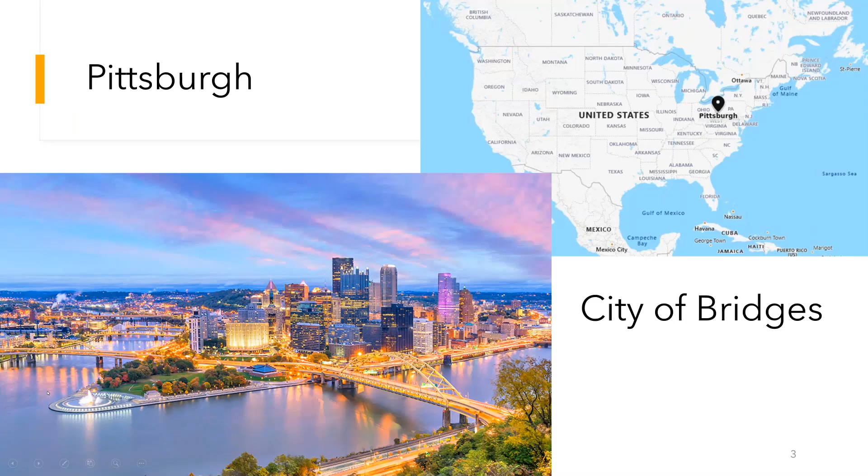As far as the city itself, our bridge portfolio, there are over 450 bridges in the city, but the city itself, we own and maintain about 143 bridges. Just to give you a brief sense of what they're like, we have 89 of those that qualify for the National Bridge Inspection Standards program, so they're over 20 feet and carry vehicular traffic.

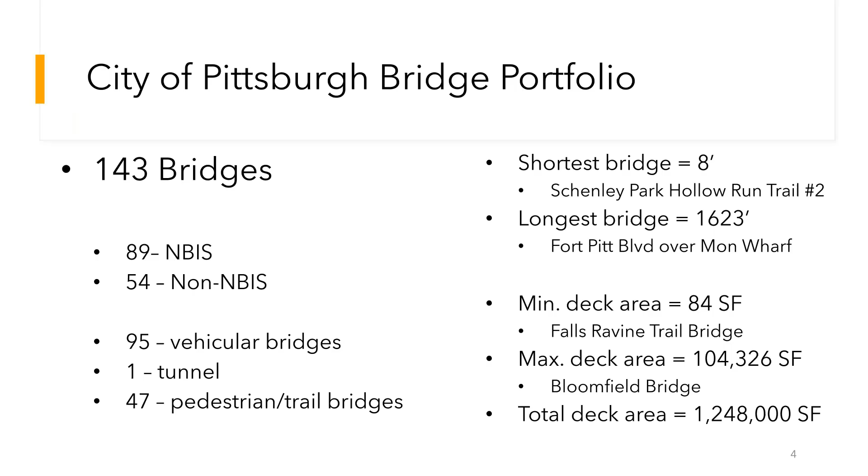We have a lot of pedestrian bridges or trail bridges, 47 of them. Our bridges range in length from 8 feet up to over 1,600 feet in length. Our biggest bridge has a deck area of over 100,000 square feet, and we maintain about 1.25 million square feet of deck area total. So I'm going to jump in and talk about the reconstruction of the Fern Hollow Bridge.

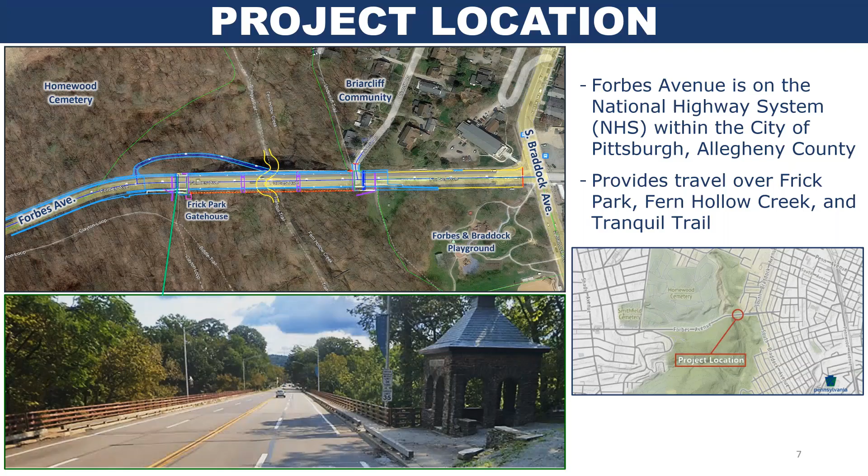So the Fern Hollow Bridge carries Forbes Avenue, a 4-lane NHS road, in the City of Pittsburgh in our eastern area over Frick Park. And the picture below is the previous bridge, shown through the trees. It was a steel K-frame structure, non-redundant, made of uncoated weathering steel. The bridge was about 450 feet long and carried about 21,000 vehicles per day. It also had a lot of pedestrian and bicycle traffic due to being in a park, and carried bus traffic.

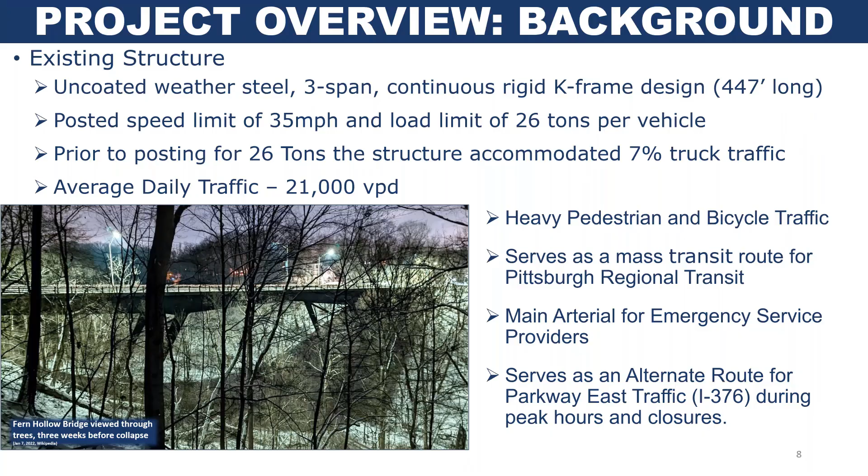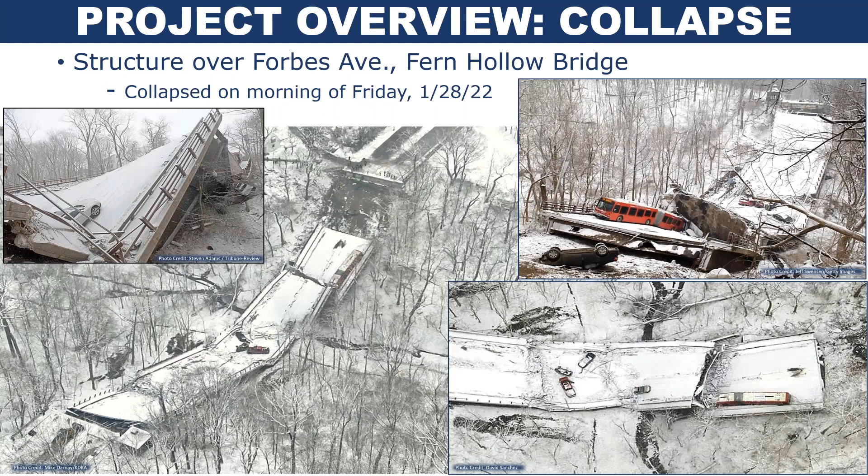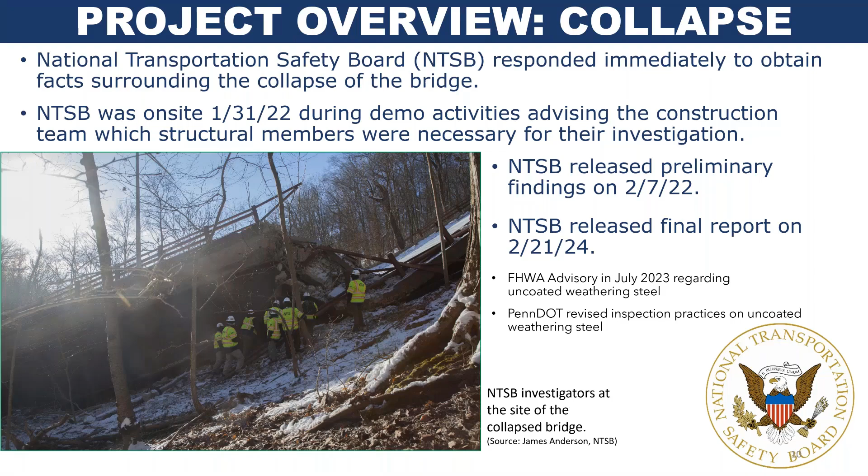Immediately after the collapse, the National Transportation Safety Board, NTSB, responded and did a thorough investigation of the collapse and some of the causes of it. I'm not going to go into that portion of this in this presentation, but the NTSB did release a final report in February of 2024, and all that information is available on their website. So if you're more interested in the collapse portion of it, I would encourage you to check out the NTSB's website where you can find the reports.

One of the first things that was done was to remove the vehicles from the collapsed bridge. One of the challenges was removing the bus, and Allegheny Crane Rental provided a very large crane that actually picked the bus up off the bridge and set it back onto firm ground.

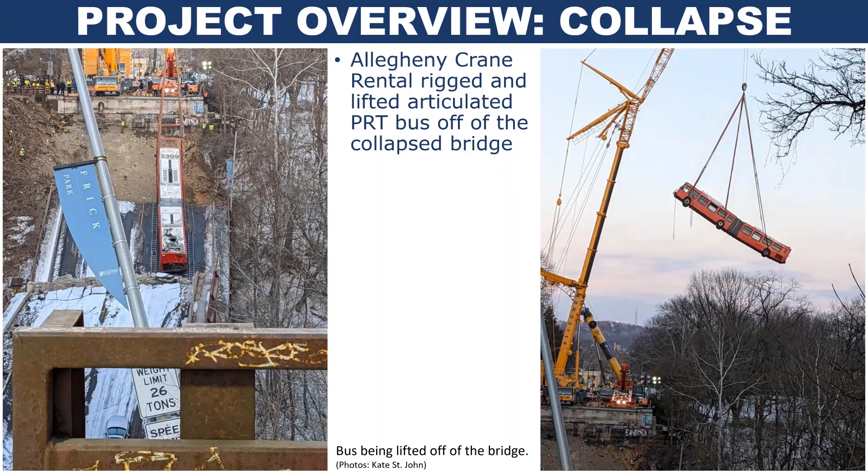Immediately the city of Pittsburgh worked with Pennsylvania DOT to rebuild this important structure, and the governor of Pennsylvania issued an emergency proclamation. The mayor also issued a declaration of emergency in the city. This allowed us to really fast track the reconstruction project.

There was a reimbursement agreement that delegated responsibility from the city to PennDOT, so they basically took over the project and ran it in coordination with us. The emergency allowed them to use a sole source procurement method and ultimately a progressive design build contract, which allowed us to get into construction very quickly, even as the design was still being completed.

We were able to streamline right-of-way, utility, and environmental processes, although all of them were completed. They were just completed concurrently instead of sequentially as they typically are.

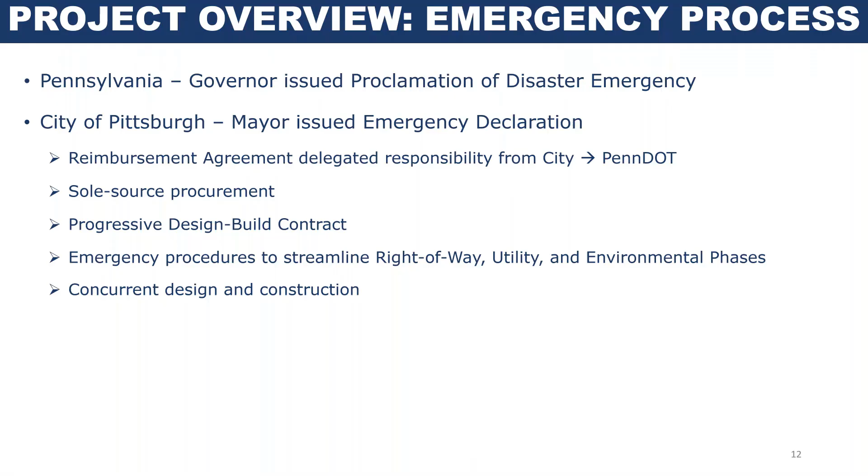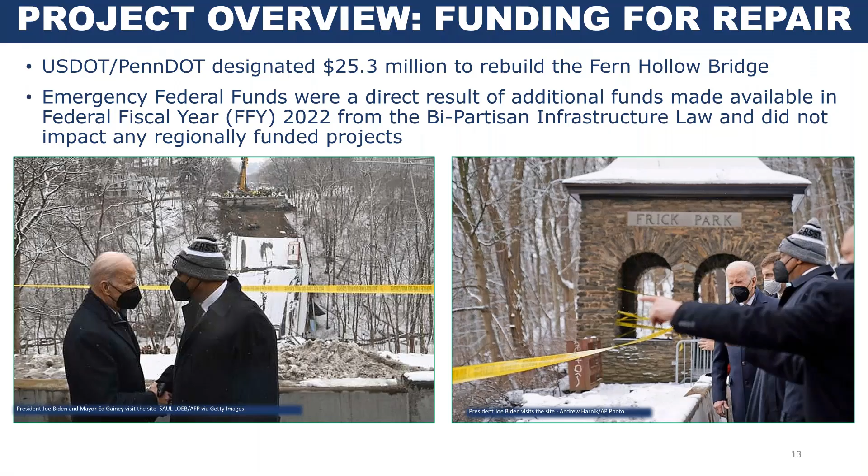It just so happened that President Biden was in town, unrelated to the collapse, that day, and he did come visit the disaster site, which brought a lot of attention to the collapse. $25 million of federal funds were able to be allocated to the project to cover the reconstruction.

There really was great collaboration between the city, PennDOT, the contractor, the designer, and all the various sub-consultants, subcontractors, and suppliers on the project, which allowed it to go very fast. We got through the whole thing and had the bridge reopened to traffic in 11 months, in December of 2022. This would typically take at least 5 years for a normal project, but by collaborating and prioritizing, we were able to really speed that up.

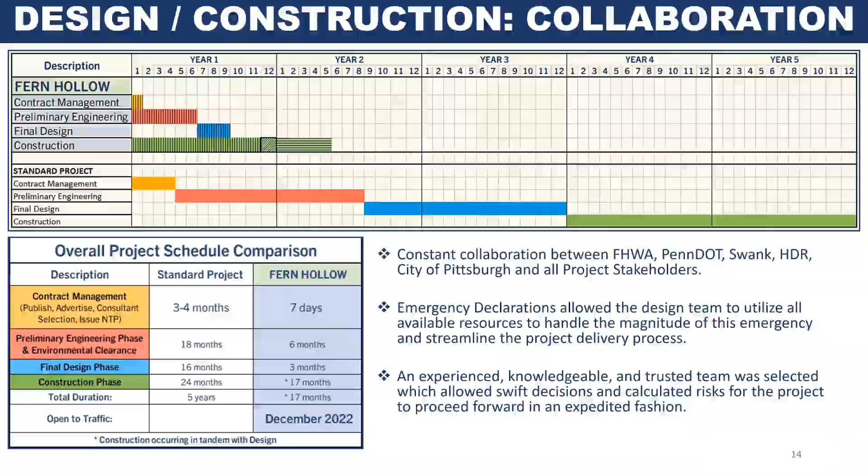Within the first one to two weeks, the city and PennDOT were working together with the design team to settle on a typical section. We were limited by site conditions that prevented widening the bridge, but we were able to reallocate the width a little bit to introduce a shared use path on one side, which was a great addition given the bike and pedestrian activity with the park being under the bridge.

We went with a three-span composite pre-stressed concrete PA Bulb-Tee beam bridge, 460 feet in length. The beams were 8 feet deep and 152 feet long, weighing over 200,000 pounds each. We made the decision to go with pre-stressed concrete based on initial conversations with fabricators and what we felt would be the quickest lead time.

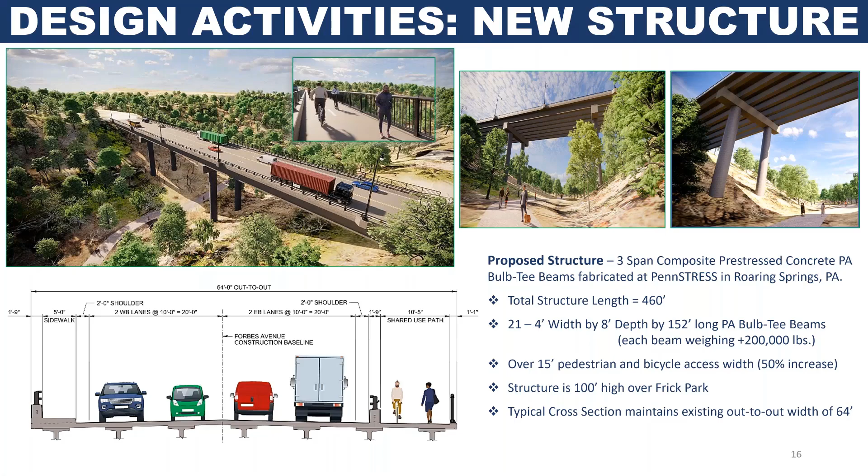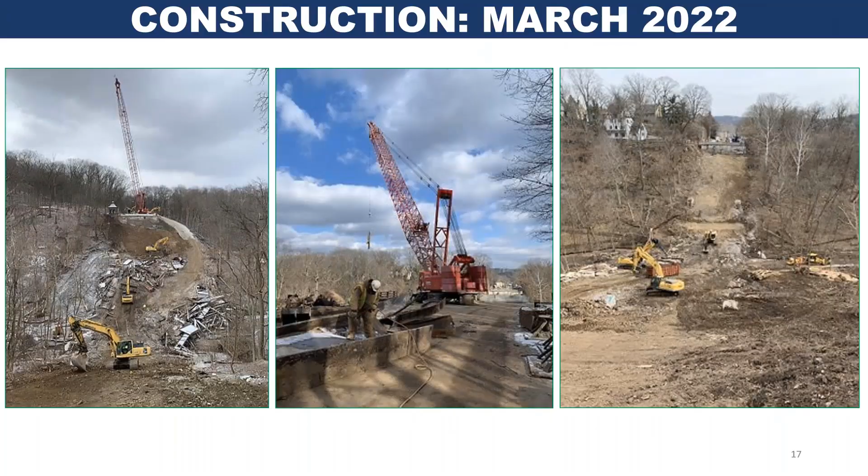Going into March, we were still working on site cleanup, and as you can see, most of the bridge has been removed. There was a bit of a lull in April as we got the design going, but by May and June we were back out building substructure, with new reinforced concrete column piers and integral abutments located behind the existing stone masonry abutments.

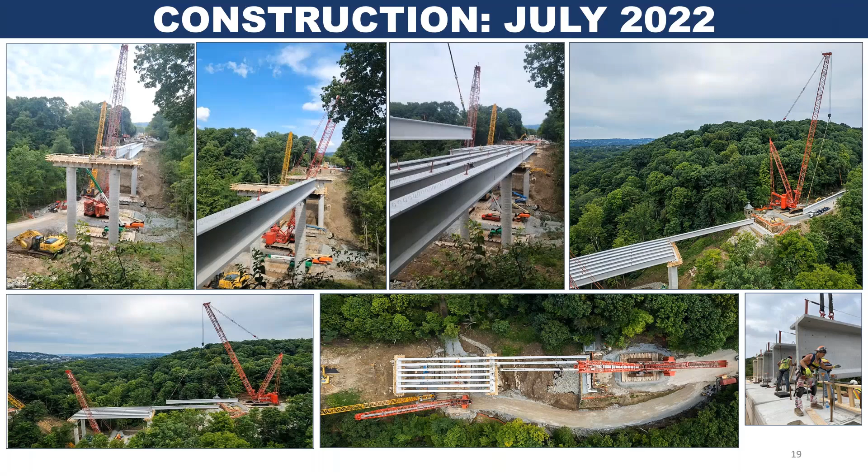In July, the substructure was complete and beams were delivered. Delivering beams was quite the event—they had to come down the Pennsylvania Turnpike and actually get backed up down city streets.

Something interesting was that when these beams came up, the neighborhood came out to see them, and it was almost like a parade. There's a lot of community pride in the reconstruction effort.

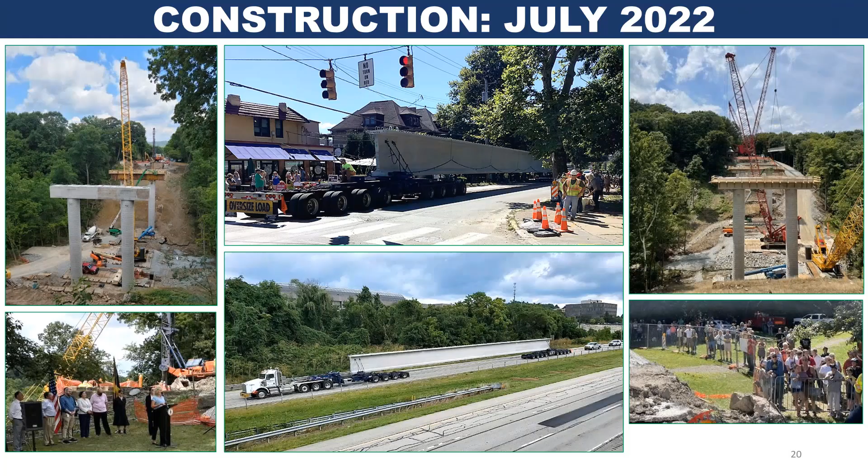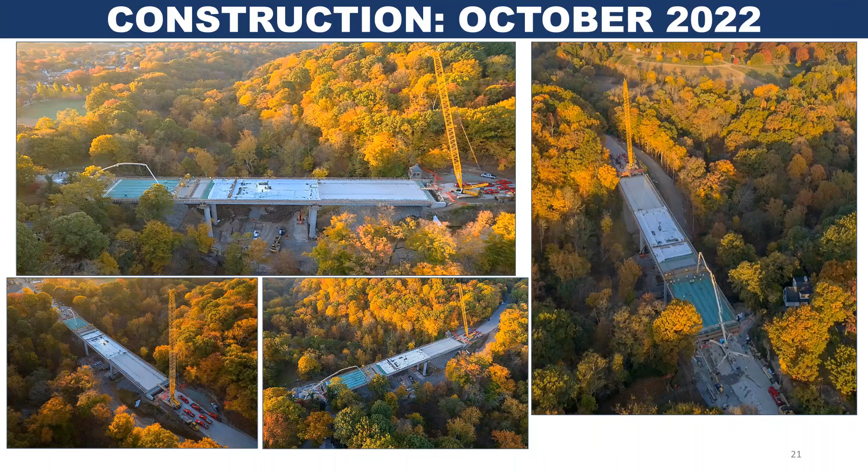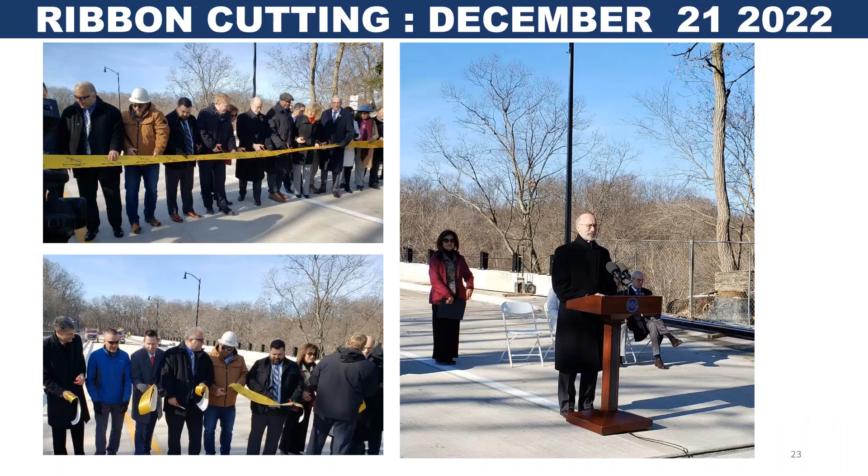Moving into November, we were finishing up the deck and getting the concrete barriers, pedestrian railings, approach work, and those kinds of things completed. Then on December 21st, just before the Christmas holiday, we had a ribbon cutting. The governor of Pennsylvania came in to celebrate the occasion—that's Governor Wolf on the right there. On December 22nd, we were able to reopen the bridge to traffic, in two lanes.

You can see there is a concrete barrier down the bridge, and we were still working on some work on the one side of the bridge, some approach work, and under the bridge site restoration. That work continued into the following spring, until about May or June. But we got the bridge reopened to traffic, as I said, less than 11 months after the collapse happened.

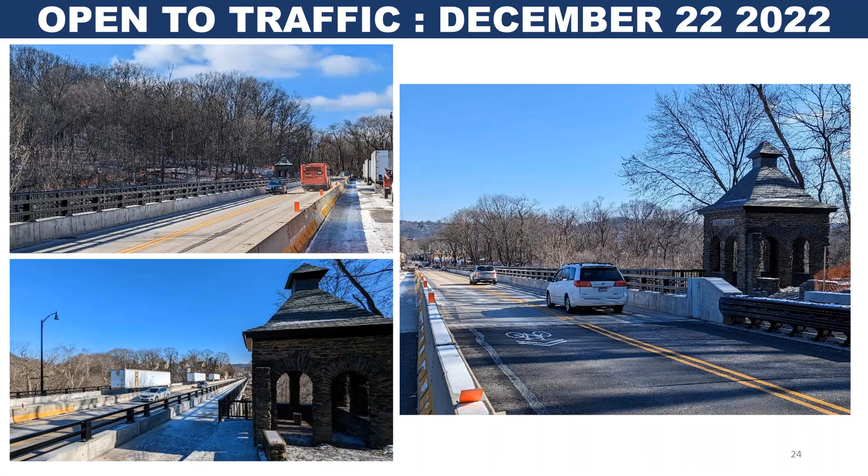So I went through that incredibly fast, but it was a great project, a lot of teamwork and collaboration amongst all the partners that allowed it to happen. Obviously the bridge collapse was a disaster, and as I think I showed, the reconstruction was a great success.

But as you might imagine, after an incident where a bridge collapses, there were a lot of questions, both from the city administration and from the public in the city of Pittsburgh. What about the rest of those bridges? I said we have about 143 bridges. Are they safe? And that's a very reasonable question for people to ask.

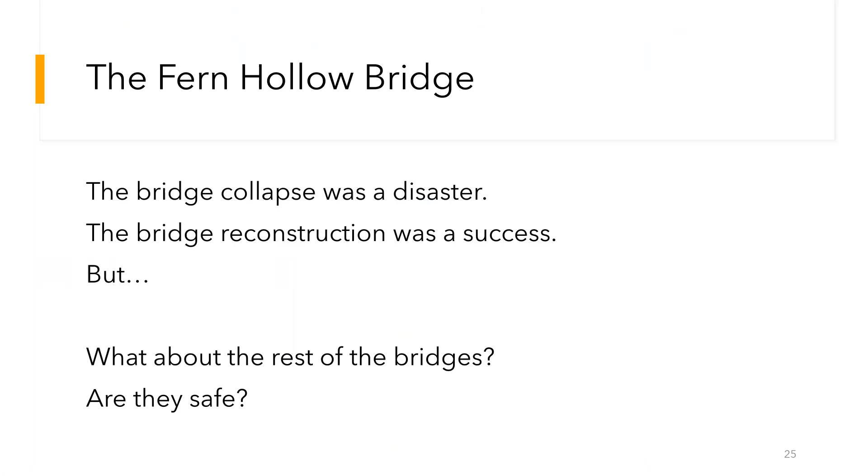So the city decided that we would put out a project for what we called the Bridge Asset Management Program. The goal was simple: to assure the public of the safety of our bridges. We would do that by hiring a team to conduct an independent, comprehensive review of all of our bridges, identify any urgent safety issues, such as high priority maintenance items that were not previously identified.

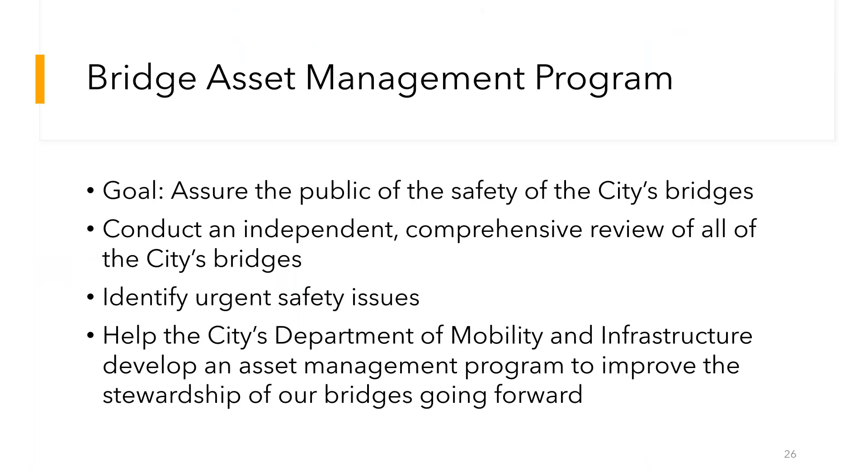Or even the need to close or restrict a bridge based on updated information. In addition to the more immediate needs, we also wanted this program to help the city's Department of Mobility and Infrastructure develop an asset management program to improve our stewardship of our bridges going forward, not just at that moment, but into the future, to make sure we prevent something like this from happening again.

So with that, I'm going to turn it over to Lou, who's going to talk to you a little bit about this program. Okay, thank you, Eric.

So as Eric said, WSP was hired on August 31st, 2022 to provide a comprehensive bridge asset management program for the city. One of our first tasks was to get a report to the mayor as quickly as possible, by October of that year, to basically ensure that there wouldn't be any more Fern Hollows out there in the city's inventory. And then ultimately we completed the project by May of 2024.

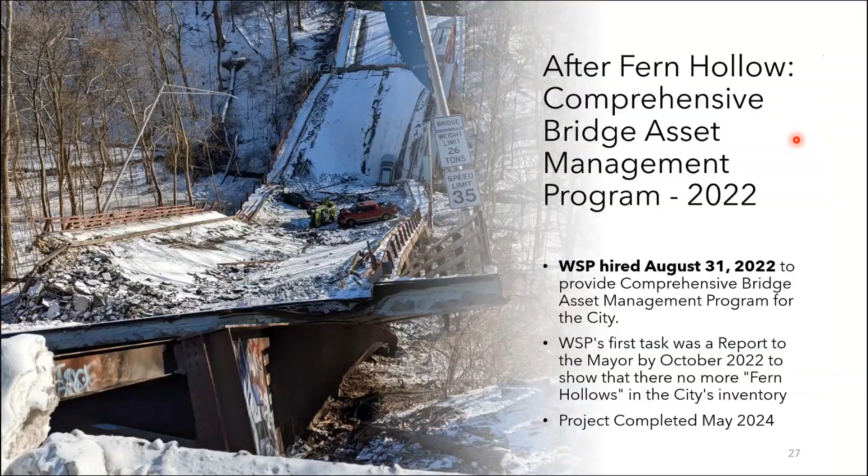I know one of the questions we got prior to the webinar was, what about the reports? Would they be available to everyone? You can see WSP's reports and recommendations on the city's website at pittsburghpa.gov/mayor/BAMP. Task 2 of our project was to do the report to the mayor.

We did get it to them by end of October, and after reviews by the city, the mayor was actually able to report during the opening of the new bridge that the report was complete.

Task 3A was to develop a list of intermediate or near-term needs, and we delivered that in March of 2023. Task 3B was a review of the Southwestern Pennsylvania Commission's Transportation Improvement Program and the city repair plan, which we delivered in May of 2023.

Task 4A was a summary report of recommended routine and preventative actions, including investigation into Bridge Care, which is PennDOT's program that does programming and what-if scenarios for all the bridges in the state. We delivered that in August of 2023.

Task 4B, we recommended intervals for bridge rehabilitation and/or replacement, also known as the Rehabilitation and Replacement Decision-Making Process Report. It was finished in September of '23.

5A and 5B were recommendations for Bridge Maintenance Division staff and technical staffing for the city's Bridges and Structures Division, which was delivered in December of '23.

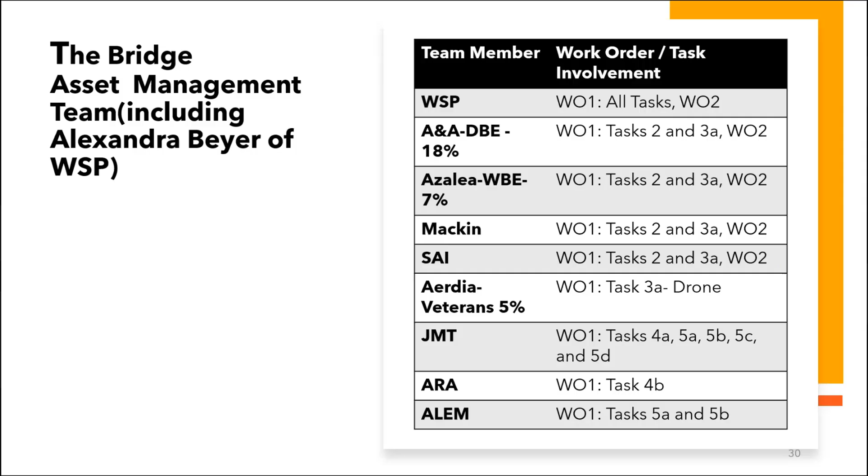We had inadequate inspection history for some of the non-NBIS bridges, like the short span bridges in the park and pedestrian bridges. Ownership records were unclear at times. As Eric mentioned earlier, there's over 400 bridges in the city owned by city, state, transit, PRT, railroad, and sometimes private individuals. There were opportunities to improve the organization and access to the original construction plans.

As a result, we decided to use a SharePoint site to share documents that both WSP and the city could update, and that turned out to be a really good tool for us.

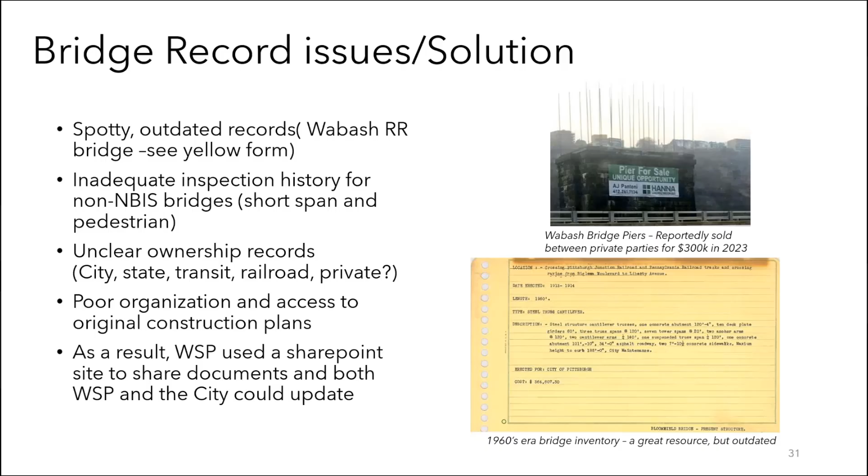A little bit of highlights of the Task 2 report. We had to go through inspection reports and photos for 147 bridges, and we found out there were no more Fern Hollow bridges out there, which was good to hear and see.

The bridges were inspected, and we wanted to make sure the conditions were consistent with the photos, and identified maintenance priorities. We made sure there weren't any out of compliance with PennDOT and federal highway policies, and then we even identified new items as necessary.

We confirmed the weight limits matched the load rating and the signs were properly placed. We recommended any new inspections, load ratings, and any new sidewalk or bridge closures.

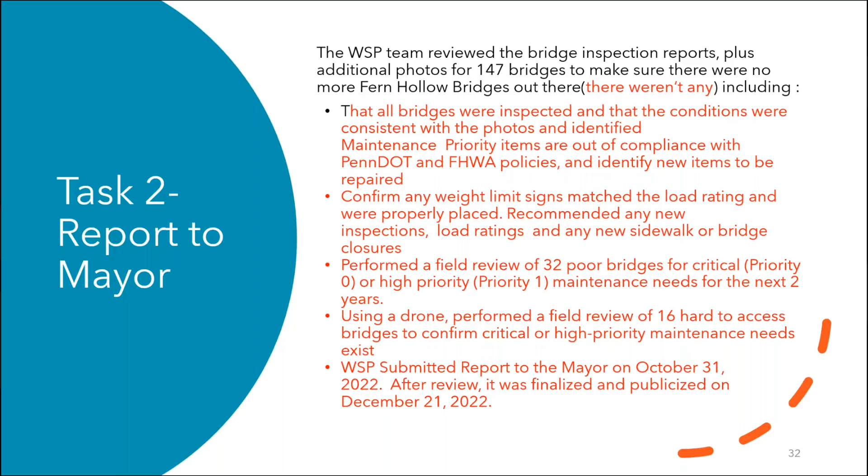We performed the field review of the 32 poor bridges, making sure that the critical and high priority maintenance needs were solid for the next 2 years. We used a drone to field review 16 of the hard to access bridges to confirm, again, the critical and high priority maintenance needs. As I said earlier, we submitted the report to the mayor in October and it was finalized on December 21st of 2022.

Some of the examples of the findings—here you see the gusset plate for the Charles Anderson Bridge. You can notice some of the holes there around the gusset plate. It was previously analyzed in 2012, but we recommended a new analysis, and it was a good thing, because as a result of that analysis, the bridge had to be closed due to the lower ratings. Currently that bridge is out in construction, undergoing a major rehab.

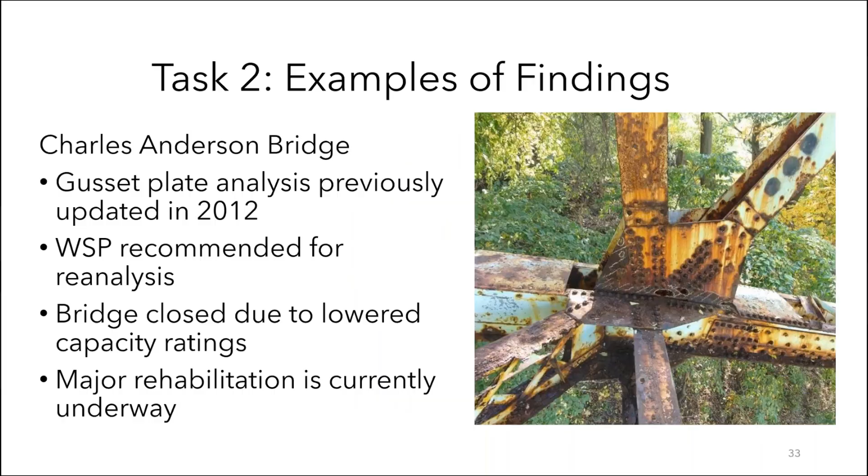Task 3A was to develop the immediate needs, which we defined as zeros—needing to be done within 7 days—and ones, needing to be done within 6 months. Then the near-term needs, defined as priority 2s that need to be done before the next inspection, which in most cases is 2 years. All in all, when we were done, we came up with $11 million in needs.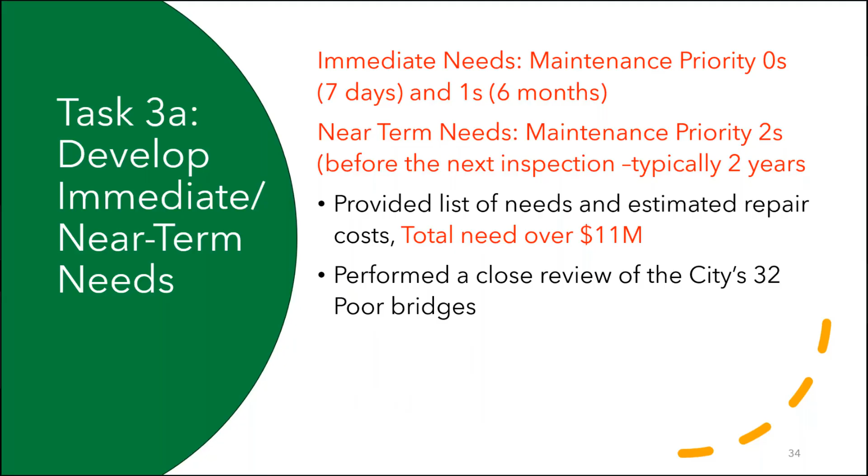We also performed a close review, as I mentioned earlier, of the city's 32 Poor bridges to confirm those needs. This is a little spreadsheet we used to keep track of everything—not only the maintenance priority, but what the city was going to do about it, whether they needed their bridge maintenance on-call contract out there, and when the repair needed to be done and when it was actually done.

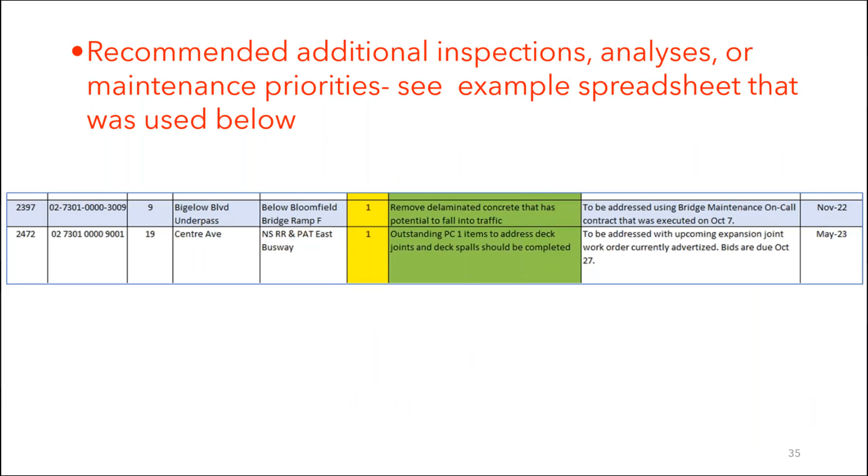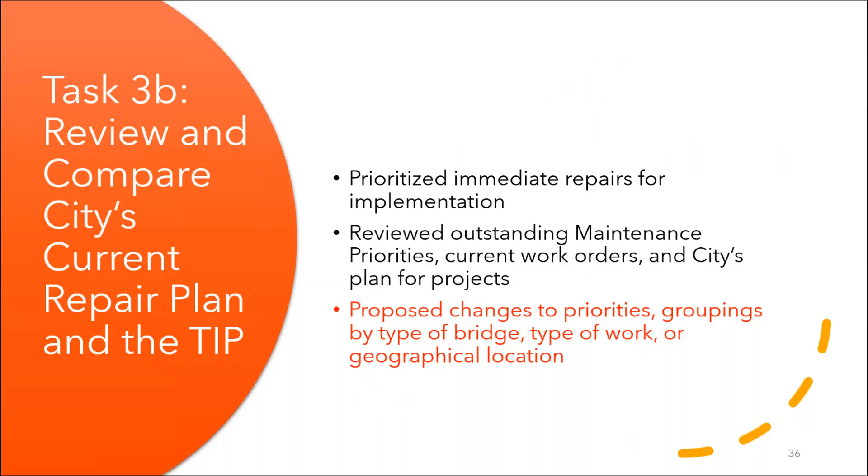Task 3B reviewed and compared the city's current repair plan with the Transportation Improvement Program for SPC, the Southwestern Pennsylvania Commission. We looked for prioritized immediate repairs for implementation, reviewed all the maintenance priorities, current work orders, and the city's plans for those repairs, and then proposed changes to priorities, groupings by type of bridge, type of work, and geographical location.

Again, we used a spreadsheet to help us with that, and we looked at where the projects were on the proposed TIP, the proposed 12-year program, and what the status was on maintenance. We came up with cost estimates for these projects, and even suggested the years at which preliminary engineering should start, final design, and then construction.

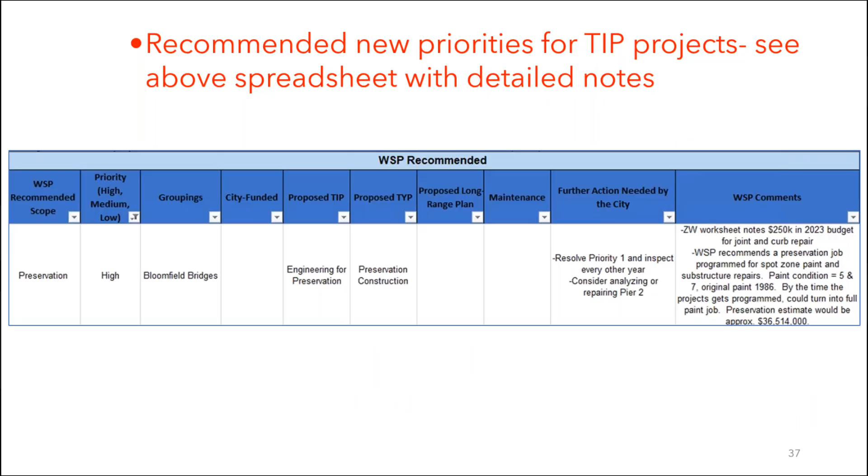Task 4A was to recommend strategies and timeframes for preventive and routine maintenance. A lot of these items came from my days back at PennDOT in District 11, Pittsburgh area. We tried to clean bridges annually whenever we could. Combustible materials identified under 17 bridges, also known as homeless encampments, were identified.

We also tried at PennDOT to replace joints every 20 years, and do full paint about every 35 to 40 years, or spot and zone painting at the 20-year time frame.

With our deck overlays, we'd shoot for 8 to 10 years for asphalt overlays with a membrane. Latex overlays generally lasted 15 to 20 years. With polyester polymer concrete overlays, we were anticipating them to last 25 years.

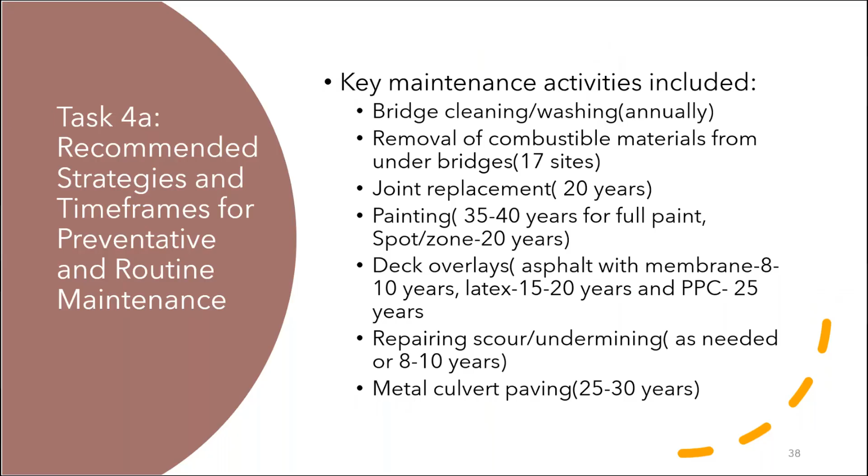Scour repairs are usually identified either by probing or underwater inspections. We try to get those done as quickly as 8 to 10 years. And then we did a lot of culvert pavings to extend the life, trying to do it around 25 to 30 years to get another 15 or 20 years out of those culverts.

Task 4B, we recommended bridges for preservation, rehab, and full replacement. A lot of this was based on the PennDOT District 11 plan for each bridge that was developed with my staff and I at the time before I retired.

For these timing considerations, we tried to shoot for 15 to 20 years for preservation projects, 40 to 45 years for deck replacements. Those would get extended to 60 years if we had good rigid overlays on them. A 160-year life cycle for major bridges and major river crossings, down to 120-year life for the rest of them, except for culverts. We look to get about a 40-year life for those metal culverts.

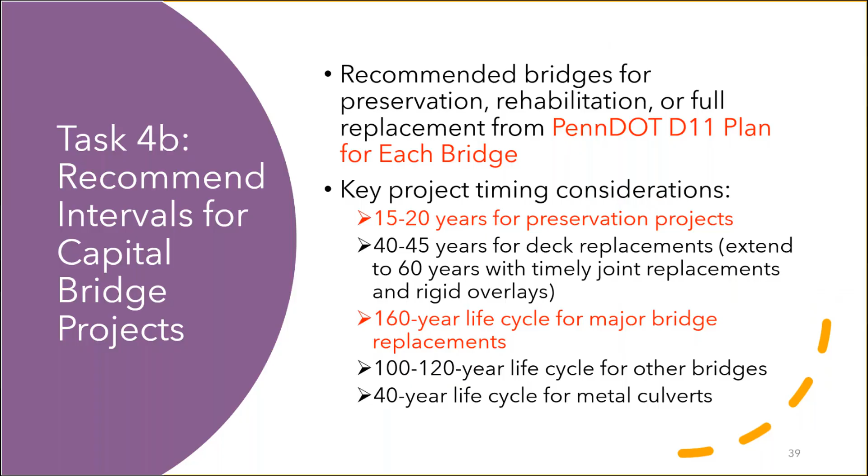Under the staffing, 5A and 5B, we had to create a bridge maintenance division. They only had a bridge maintenance contractor there at the city, and then we recommended staffing for their structure division, which included bridges. We went in and looked at everything.

We looked at numbers of staff, the positions, the skills. They wanted to know the compensation needed to pay these individuals. And we looked at either rental or buying equipment options for them and funding as necessary. We talked about making sure you had a good emergency response plan as part of that staffing.

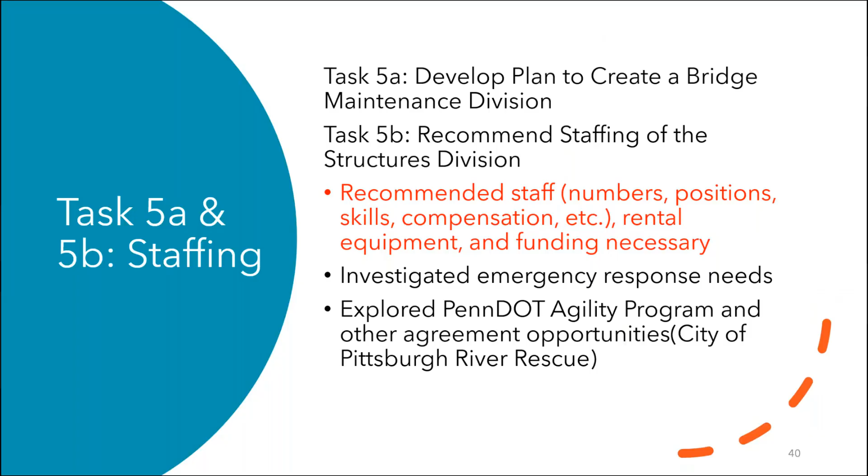We even looked at the PennDOT Agility Program and other agreement opportunities. The Agility Program is basically where the city does some work for PennDOT in exchange for work that PennDOT does for the city. An example is they have a river rescue boat that we've used a number of occasions when barges get hit, and we get on that boat, take a look at the bridge piers and the bridges in general, and then we're able to open the bridges a lot sooner than if we hadn't had that boat.

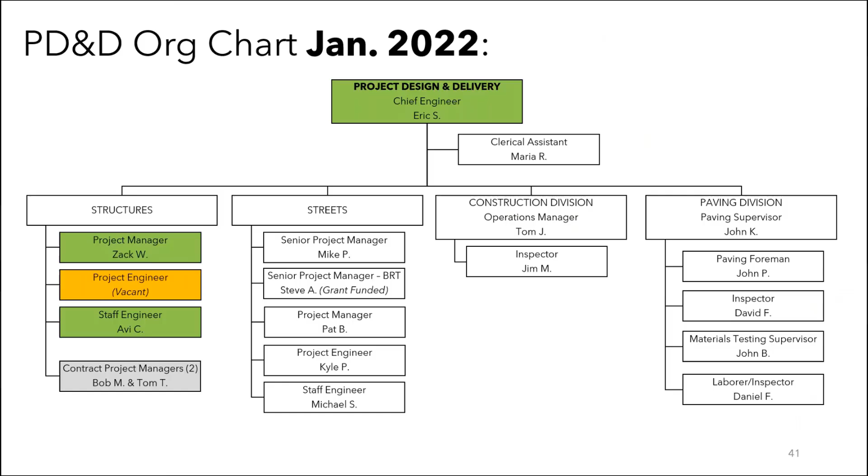As we went through our recommendations, we recommended increasing the staff from 7 to 25 employees, spread between the maintenance division and the structure division. You can see we recommended breaking up the design and inspection sections under a bridge asset manager there on the left. We also included CADD technicians so they could do their own bridge design projects in-house, and have some people available to do inspections as needed. That was prior to the collapse.

That was being done by just design people who just didn't always have the time to get out there and work on maintenance priorities. So we thought those should be new positions. We also added some senior project managers, regular project managers, and a city bridge engineer. We also suggested a bridge maintenance supervisor with a foreman, and then 3 maintenance crew positions, along with a project administrator to help with some of the reimbursement agreements, getting them through the system.

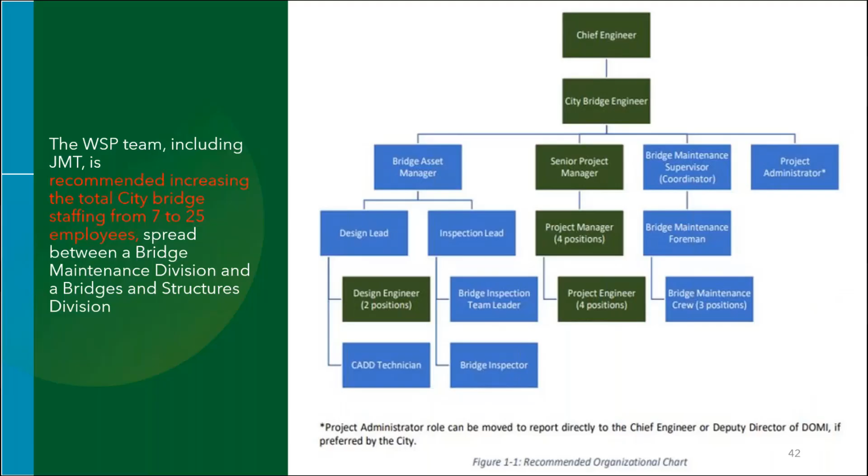Under task 5C and 5D, we were looking at process improvements. We identified inefficiencies in the current city processes. Some of the things we were suggesting: they want us to look at contracting, reimbursement agreements, especially a city-specific reimbursement agreement, legislation if needed for things like design build, and budgeting.

We recommended the use of higher project estimates to reduce the number of reviews by the Office of Management and Budget, the Law Department, and the City Council. Basically, if a project changed by $1, it had to go back through all those different departments for review, which really slowed the process down.

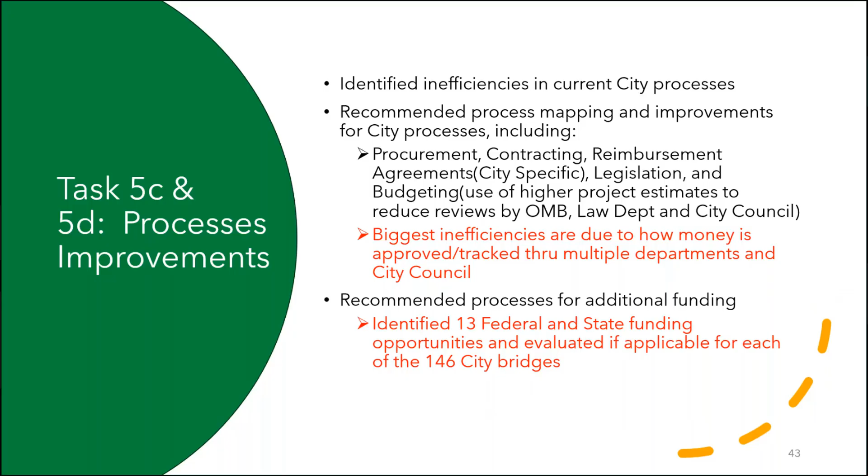And then we recommended processes for additional funding. We were able to find 13 different federal and state funding opportunities, and we basically recommended one or a couple of those for each of the 146 bridges in the city's inventory.

Overall, we recommended 27 recommendations to the city, plus 9 design and construction contracting ideas, like having not-to-exceed contracts, doing bridge bundling. PennDOT District 11 actually created an open-end contract for city design projects, wanted them to be more conservative in their programming and cost estimates, and they were able to do 2 bridge bundles that are currently in preliminary engineering.

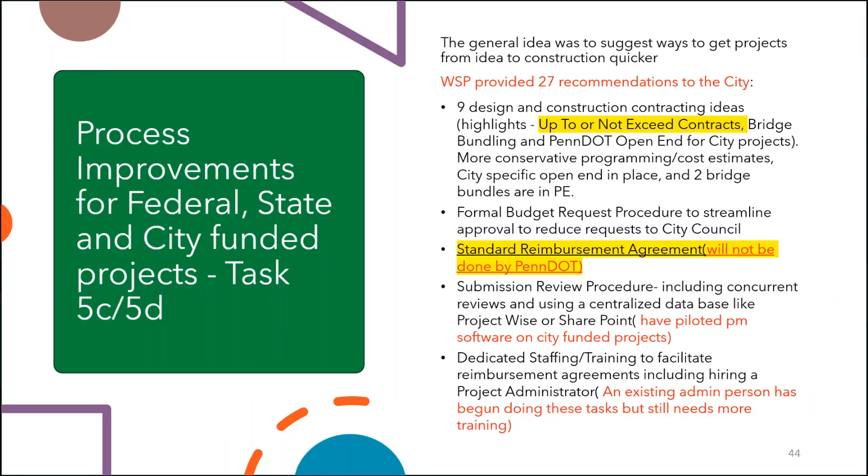We want a formal budget request procedure to streamline approval and reduce requests to the city council, as mentioned earlier. We wanted a standard reimbursement agreement, but that ultimately couldn't be done in discussions with PennDOT. However, they piloted a submission review procedure with concurrent reviews, using a centralized database like ProjectWise or SharePoint, and dedicated training to facilitate these reimbursement agreements. They used an existing administrative person for this, and they've started doing these tasks, but more training is still needed for that person to make the desired improvements.

Thanks, Lou. Lou went through all the effort of the WSP team, but essentially the city was just way behind. For a whole variety of reasons, our staffing had been cut over the years, and we knew we were in a tough spot. This asset management contract made a huge difference. All the things Lou talked about really set us up for success moving forward. It's a big hole, so we're not there yet, but we're making huge amounts of improvement. Fundamentally, the biggest thing is if someone asks, are our bridges safe, we can confidently say yes.

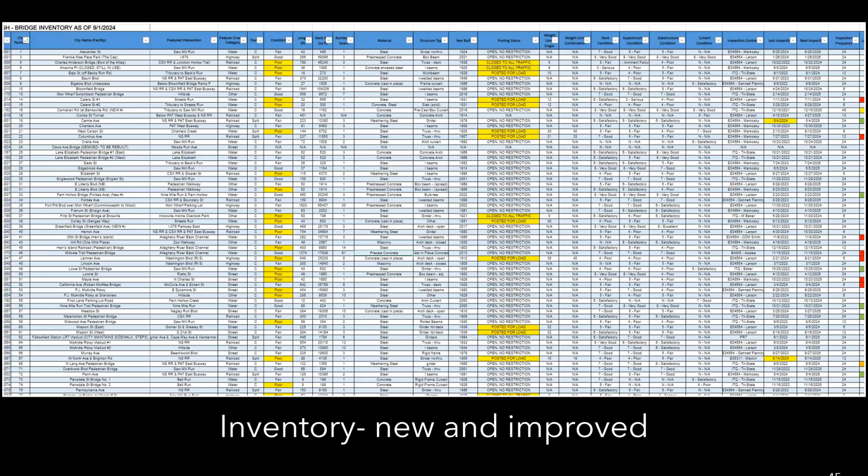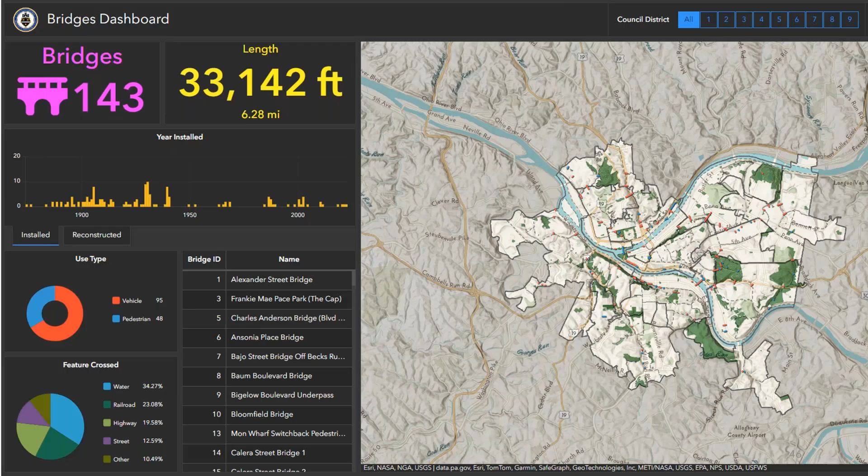So I'll talk about where we're at these days. First, we have a really thorough and accurate inventory now, which, as Lou talked about, wasn't the case before. We're primarily using PennDOT's BMS2 system online, but we can also download that data into spreadsheets for daily data manipulation. We created a public bridge dashboard so any resident can go online and see where our bridges are and some basic stats about them. That's part of our transparency efforts.

In the world of bridge inspection, the inspection for all our NBIS level bridges is done under contract with PennDOT. District 11 handles that contract for us, which is a huge help. But since all this, we've made sure we're very involved in that contract and very communicative. We meet with the inspection consultant every month for two-way communication, to see what they have coming up and to let them know about anything we want them to pay close attention to. As we've been able to grow our staff per WSP's recommendations, we're now able to do detailed reviews of all inspection reports by our engineers when they come in, which wasn't happening pre-Fern Hollow, just based on staff capacity issues.

Lou mentioned they took a close look at analyses, and that kicked off a large effort. Since 2022, we have new load ratings on file for 83 of our bridges, to make sure they're accurately reflecting current conditions. This resulted in 6 closures since Fern Hollow as part of this work. We also had to make emergency repairs at 4 other bridges so they didn't have to be closed, and we've reduced load postings at 12 locations over the past several years. Currently, of our 143 bridges, we have 8 closed bridges in total and 17 load posted bridges in total.

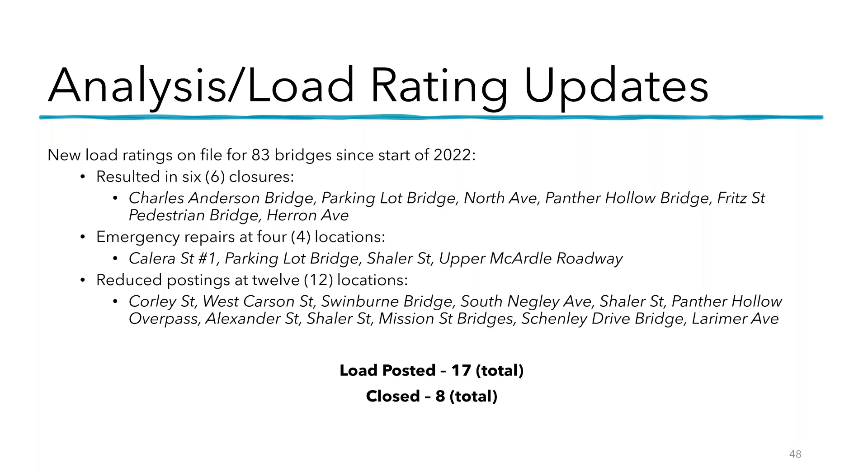It's down at 13%, and nationally it's below 7%. So we have a ways to go.

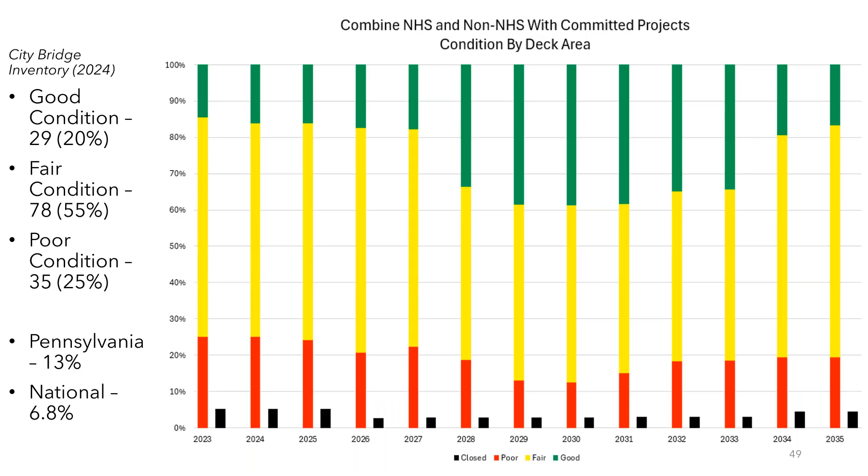We reran this just a couple weeks ago in 2026. Our numbers have not moved much yet because we have a lot of bridges, I'll show in a bit, in the design process right now for major rehabilitations, replacements, or even preservation work. But we've also received more local maintenance funding in recent budgets, which I'll talk about.

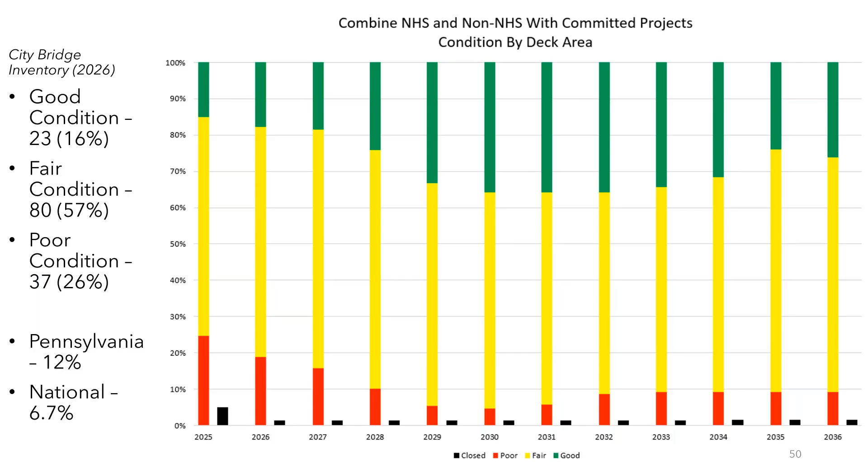That is predicting that with the money we currently have identified, we can get our percentage of poor condition bridges down below 10% in the 2029-2030 range as all this work comes through. So while we're not there yet, it shows we're on the right track, and if we keep up the progress and keep pushing these projects and repairs through, we are moving in the right direction. Part of that is due to increased local funding.

For those familiar with government budgets, usually you have an operating budget for staff and day-to-day operations, and then a capital budget, often funded with bond money, for more long-term capital improvements.

On the operating budget side, before this work, we had no operating funding identified directly for bridge maintenance, so any bridge maintenance work was coming out of our capital budget. After Fern Hollow, we were able to get just under $1 million of maintenance operating budget money annually for maintenance and for other things like local bridge inspection and bridge cleaning, all those things that should be happening routinely.

That number gradually increased, and this year our new mayor reopened our budget and was able to bump that number up to 1.9 million. That's a big increase, and it's predicted we will maintain at least a reasonably similar operating budget going forward.

That makes a huge difference in the amount of work we can get done. Our total spending—of course we do a lot of projects with state and federal money, our bigger projects that are listed on the Transportation Improvement Program, the TIP.

So that's one bucket. But as far as local work we're doing just using our own money, the right graph here compares the 4 years prior to Fern Hollow, where we spent a little under $2 million total, to the 4 to 4.5 years since, where we've spent almost $8.5 million total.

So through additional funding, additional staff, and some other things I'll talk about next, we've really been able to increase the amount of money we're spending annually to get through some of this backlog and make sure our bridges are staying in better condition.

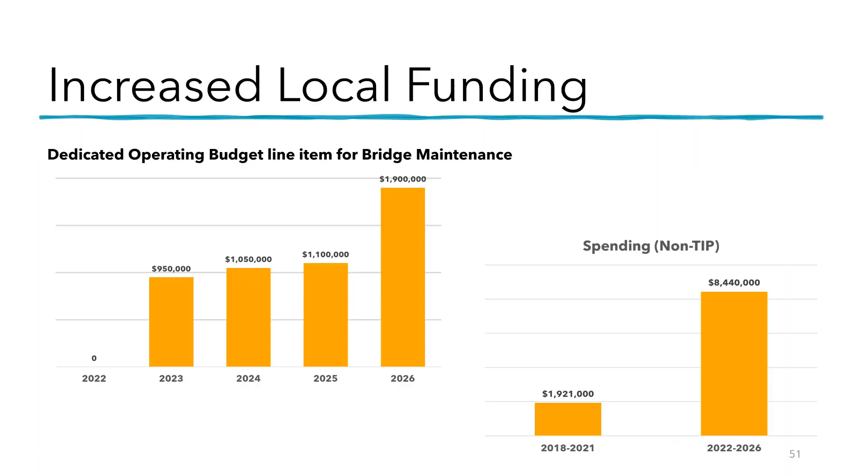Part of that was revamping our bridge maintenance on-call contract. We have a contractor who can do work orders for us—it's a very efficient way to get work done. For a variety of reasons, the previous contract was not working well for us and was hampering our ability to get work done, so our engineers totally revamped that contract in 2022 and then again last year, and as a result it's been much more productive.

We've given out about 69 work orders in the last about 4 years—a lot of deck joint repairs and reseals, either strip seals, compression seals, or even EMSeals, which is something we got from District 11, more of a short-term fix but relatively easy to install. Because as anyone in the bridge world knows, leaking joints and water getting down into the beams and substructure is really horrible for bridge life, so we're putting a big emphasis on that.

We've done about 46 high priority work orders to deal with some of the higher priority maintenance items that Lou mentioned earlier—things like undermined bearings, delaminated concrete that may be causing hazards, exposed rebar in the decks, downspout repairs, girder and steel repairs, things like that.

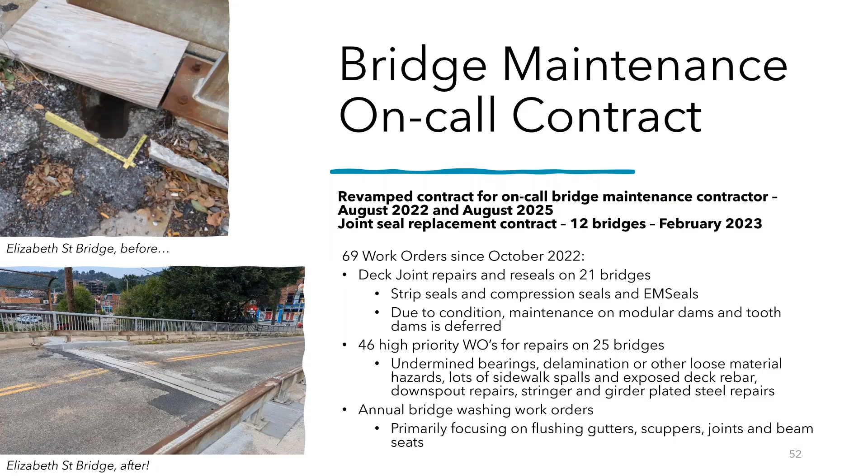We are doing an annual bridge washing work order to make sure we're keeping our bridges clean, keeping the scuppers and gutters functioning so water is going where it's supposed to. The other thing Lou alluded to is we started up a brand new bridge maintenance division.

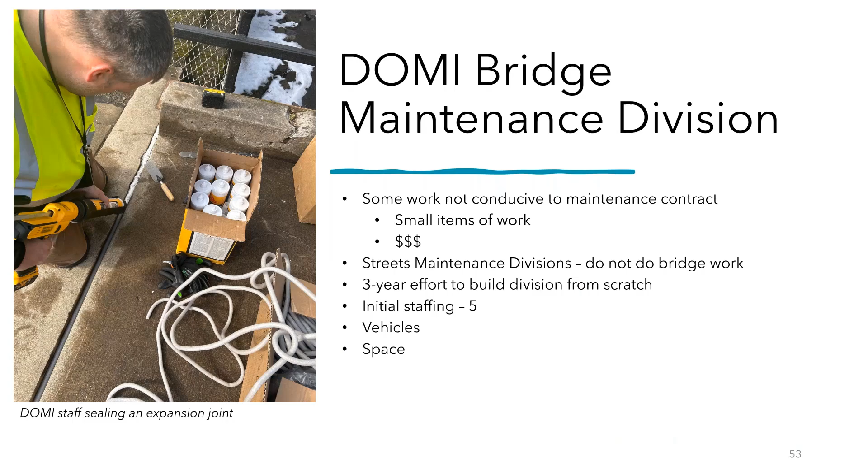This is in-house staff doing maintenance work. Of course, some of our smaller work isn't really conducive to putting on a maintenance contract with a contractor because they're just too small for them to do it effectively, and it just costs a huge amount. The city does have a streets maintenance division, but they weren't set up to do bridge work. It was about a 3-year effort to build this division from scratch. Per WSP's recommendation, we have a staffing of 5, and we had to do everything from the ground up, hiring the folks, putting procedures in place, buying vehicles, and identifying space.

They are fully functioning and working. Our theory was to start small with things like bridge washing, vegetation management, smaller concrete repairs on sidewalks, pedestrian bridges, low traffic bridges, and some simpler seal replacements. You can see some pictures there on the left. This year we were able to get 2 seasonal laborers put into the budget. We're just getting those guys on staff now to work over the summer, which will give that crew more capacity to take things on.

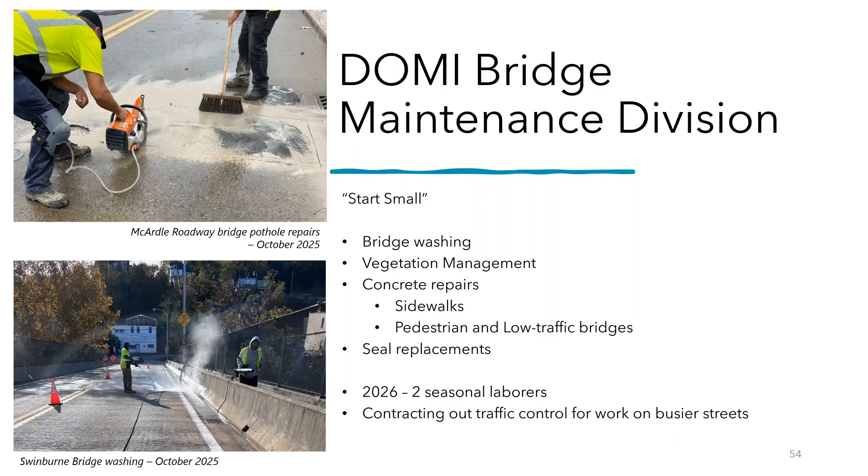We're also contracting out some traffic control so that staff can work on some of our busier streets. As a case study, one of our bridges, California Avenue, is a fairly large deck truss. Our bridge crew went out and cleared vegetation, cleaned and flushed the deck scuppers and joints, and it cost them less than $2,400. If we had issued this to our on-call bridge maintenance contractor, it probably would have cost almost $35,000.

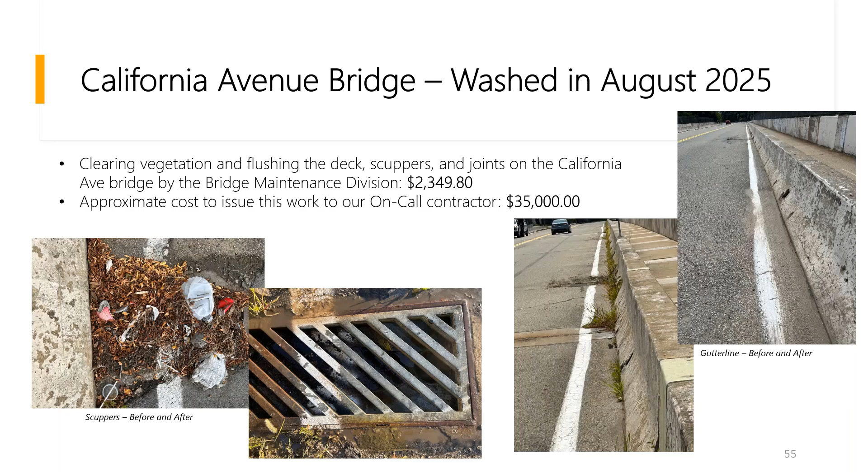So this is really a way we can save money and stretch our dollars farther and get more done. On the Transportation Improvement Program, we've been able to increase the number of projects getting state and federal funding with the cooperation of PennDOT and the Southwestern Pennsylvania Commission. This is probably 3 times more projects on the TIP than back in the 2019-2020 era. We have 2 bridges in construction, 14 in design, and 4 more being started up. We've also gotten an annual bridge preservation line item on the TIP, which helps with that preservation work.

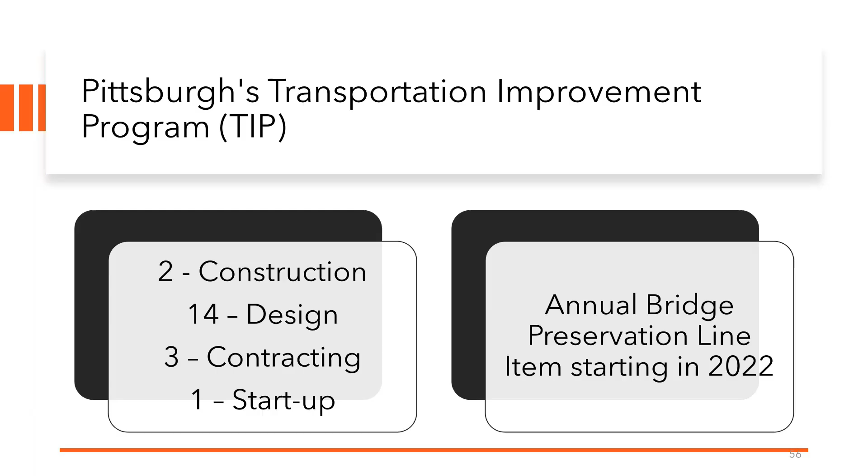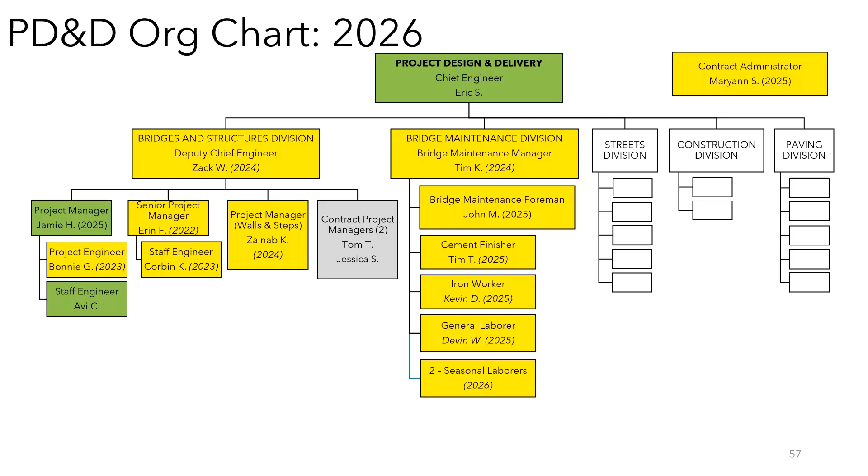Just a couple more slides. So briefly, where we are at today. This is our org chart as of now, and all the positions in yellow are new positions since before 2022, and the green are positions that existed at that time. So we've really been able to increase. We have 16 people plus those 2 seasonal laborers. So we're not quite at the 25 recommended by WSP, but we are making progress little by little.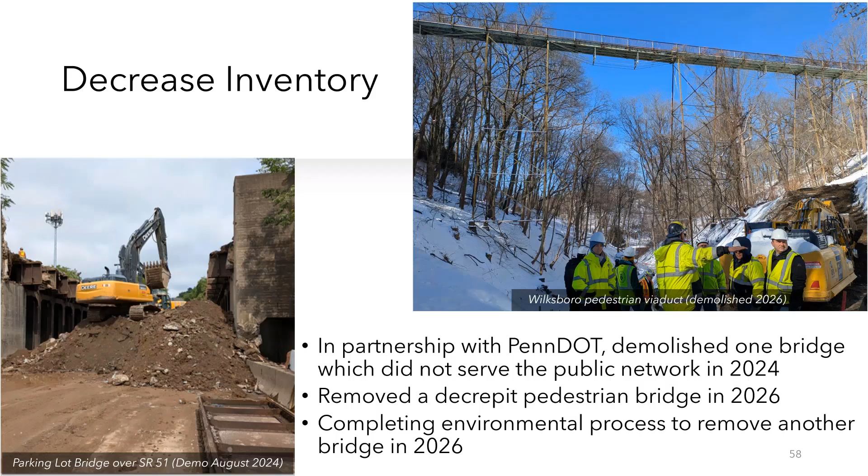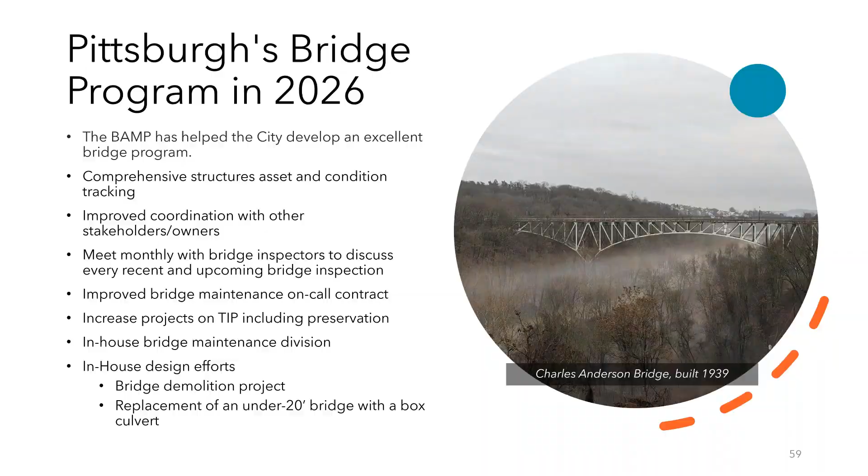So where are we at in 2026? The Bridge Asset Management Program has really helped the city develop an excellent bridge program. We have comprehensive structure, asset, and condition tracking, improved coordination with other stakeholders, owners, and bridge inspectors. Our bridge maintenance contract has been improved and greatly successful, with more projects on the TIP and the in-house bridge maintenance division. One other thing I haven't mentioned is that as we've grown our engineering staff, we've been able to take on some in-house design projects. We designed the bridge demolition project for that pedestrian bridge, and we are currently designing an under 20-foot bridge replacement with a box culvert. So I threw a lot of information out there, but that is the end of our presentation.